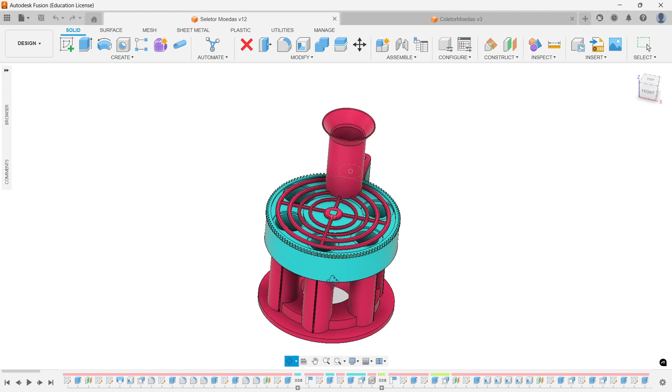Today we will continue the development of our coin collector project through a classification system, and you will learn how to create these 5 coin collecting elements that will be responsible for receiving and storing our coins.

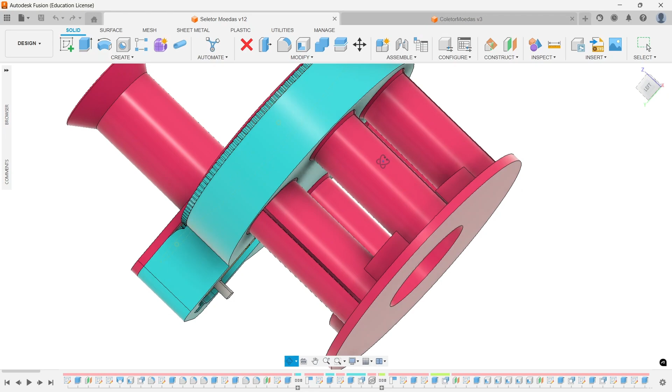From now on, come with me to our Projects tab, and we will start designing each piece from the last piece we finished.

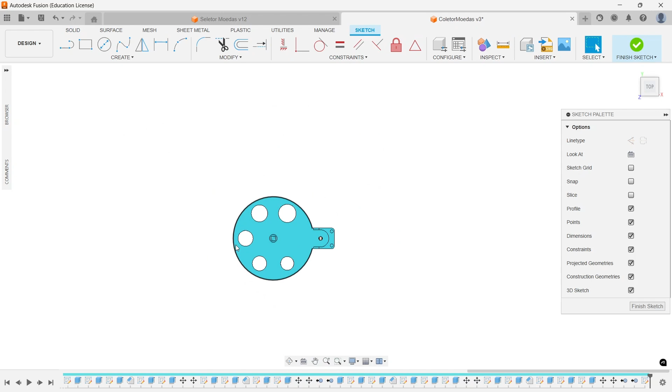Let's get started. First, we will draw the first coin collector, which is for the smallest coin, the dime. Click here and select this side so we can start drawing. Remember that the dimensions we are using are for the Brazilian coins we are using as reference. Adapt this project to the measurements of your country's currency.

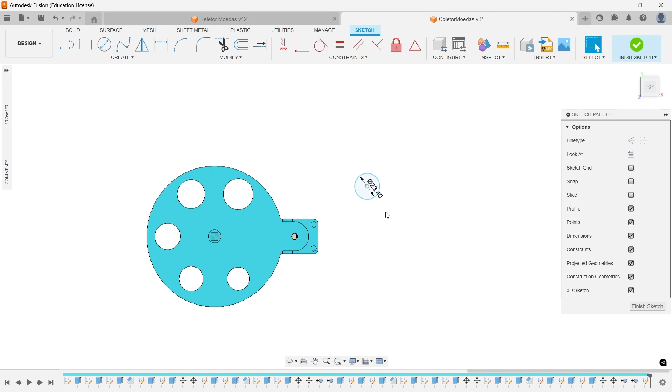Now, select the Circle tool and draw a circle with a diameter of 23.4 millimeters. Then finalize the sketch and go back to the isometric view. Select the Extrude tool and apply a value of 67 millimeters.

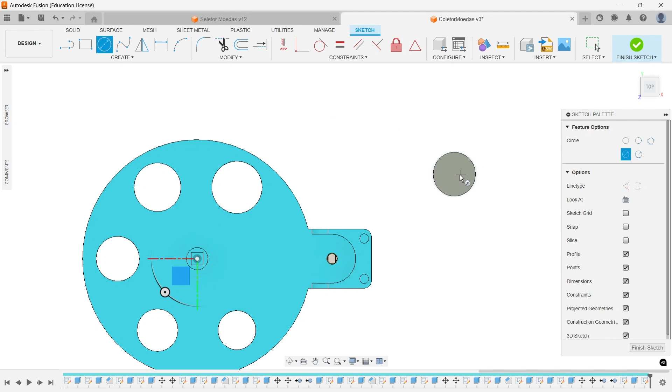Next, you need to create a new sketch, and now select this face. With the face selected, select the Circle tool and draw a circle with a diameter of 26.4 millimeters. Click Finish, and now use the Extrude tool.

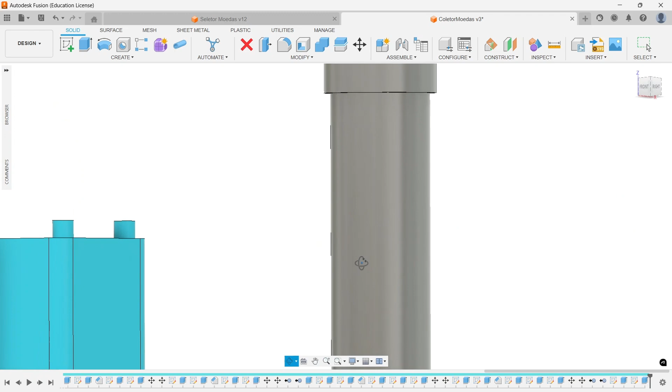Select the entire circle and now apply a value of 9 millimeters, then rotate your piece. And apply a chamfer worth 1.5 millimeters.

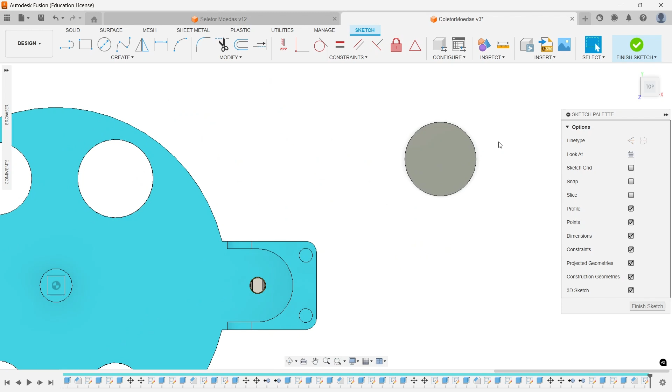After applying the chamfer, return to the isometric view. Create a sketch on this face, and now create a new circle with a diameter of 23.4 millimeters. Finish the sketch and now apply an extrusion with a value of -4 to remove material.

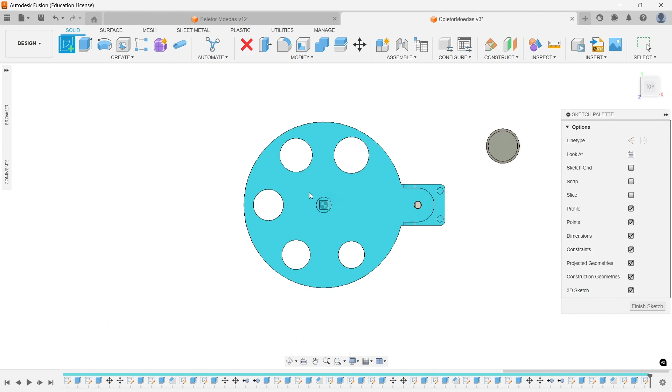Then create a new sketch on that face, and now with the Circle tool, create a circle with a diameter of 21.9 millimeters. Finish the sketch, and now use the Extrude tool. Select this circle and set a cut value of -70.

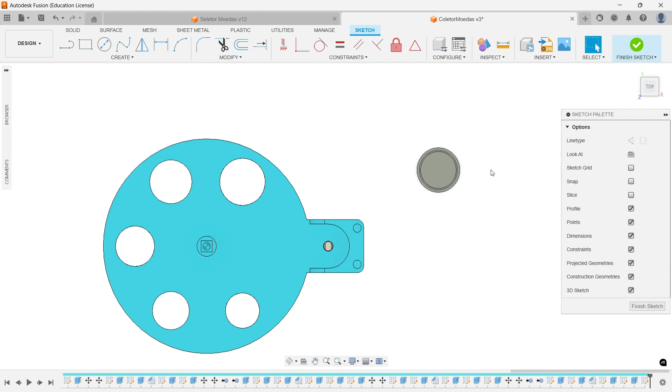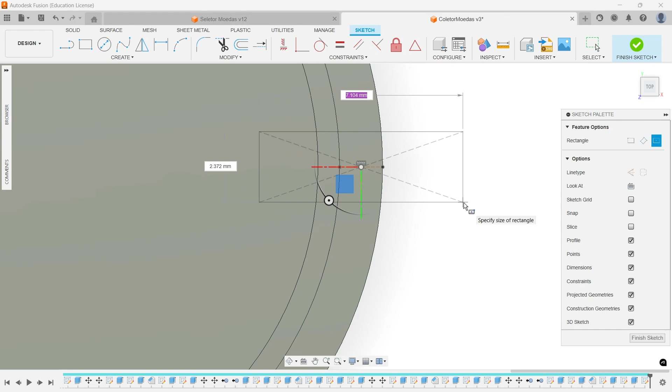Finally, select this face. Select the Line tool, click on this tangent point, draw a line and put it in construction line mode. Now, with the Rectangle tool, select a rectangle with a center, and at the midpoint create a rectangle with a length of 30 millimeters and a width of 1.5.

After creation, finish the sketch and now go back to this view. Select the Extrude tool and apply a cut to the entire piece.

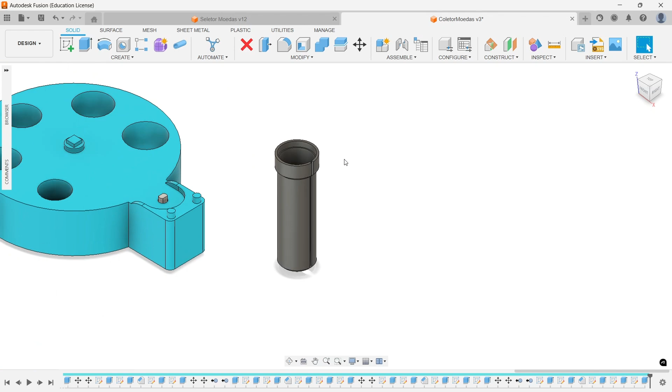This structure of this cut will serve to facilitate the connection of this piece with the hole where we will fit it, in such a way that it can enter and apply a certain pressure through this cut on the inside and ensure that it is completely fixed in place.

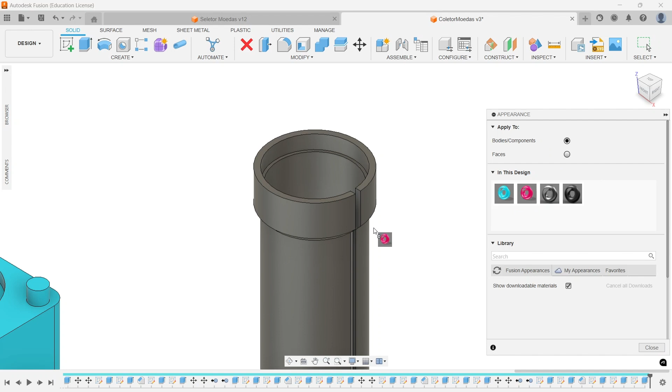Next, click on the letter A to enter appearance mode. Select this red material and apply it to your piece. That's it. Now our next step is to select this piece.

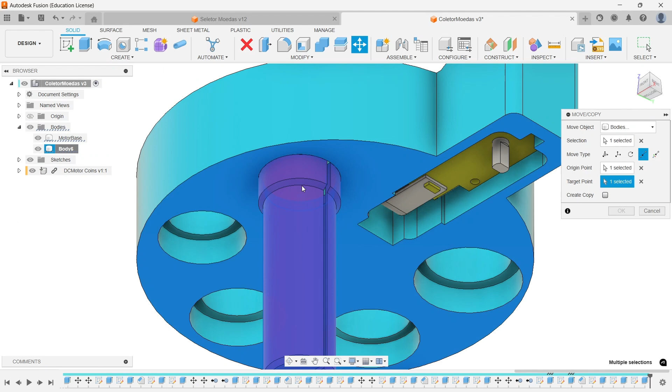With the Move tool you will position this piece through points. Click CTRL, select this point, and now we will position it in its place. Now apply a value of 9 millimeters, and that's it. Our piece is positioned in its desired location.

Let's do this same procedure for the next coin collectors. For our next coin collector, we will perform the same procedure, and now change the name of this body and put the name of our currency to make it easier to identify. Next, we will carry out the same procedures we did previously, and now draw the collector of the Brazilian 5-cent coin.

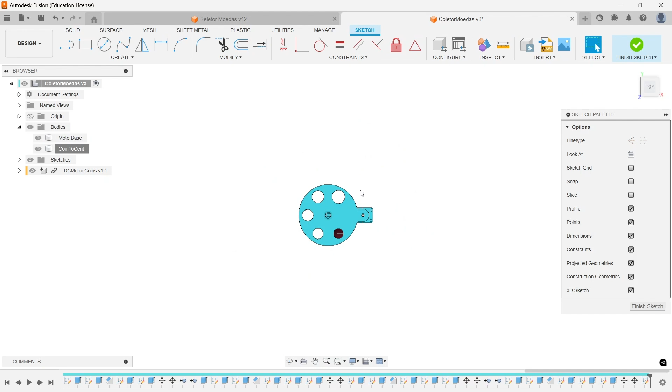You will create a circle with a diameter of 25.4. Click OK, and now apply a 67 mm extrusion.

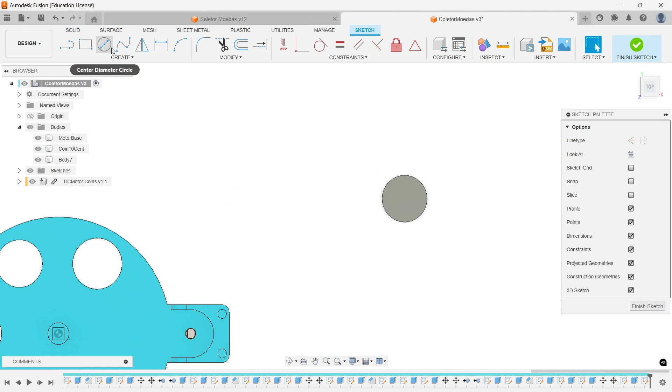With the extrusion applied, select the sketch tool, select this plane, and now draw a circle with dimensions of 28.4.

Now finish the sketch and go back to the isometric view. Using the extrude tool, apply an extrusion with a value of 9 mm. Then, apply a chamfer at that point.

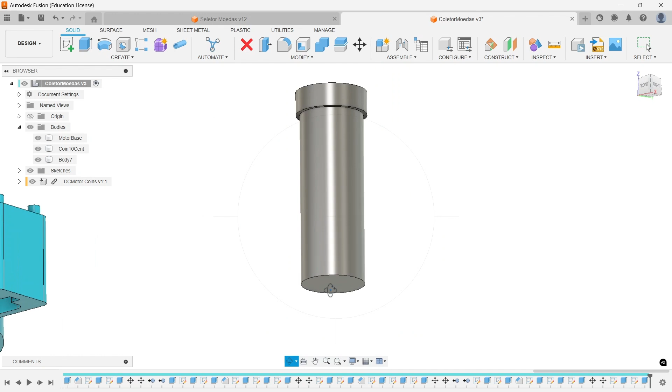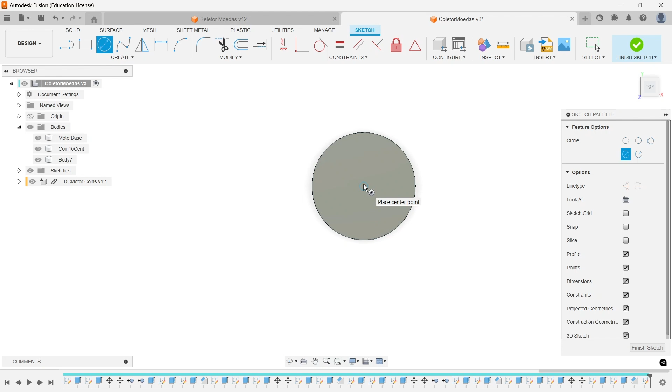Apply a 1.5 chamfer. Now, through the sketch tool, select this plane. Select the circle tool and draw a circle with a diameter value of 25.4. Now finalize the sketch. Select the extrude tool and apply a value of -4 for the cut.

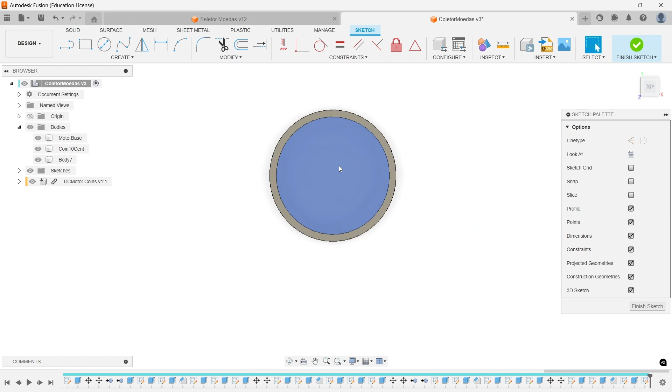Do the same procedure by clicking on Sketch again, and now select this face. Create a circle with a diameter of 24 mm. Finalize the sketch, then select the extrude tool and apply a cut value of -70 mm. See the result. Now, to finish.

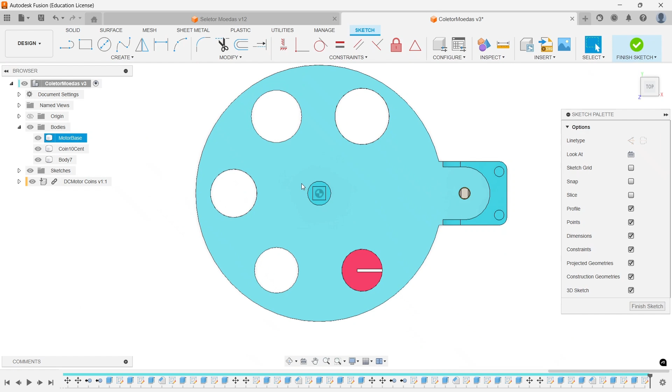We will make a cut to make this structure more malleable, so that it can fit into the whole structure and facilitate its fixation.

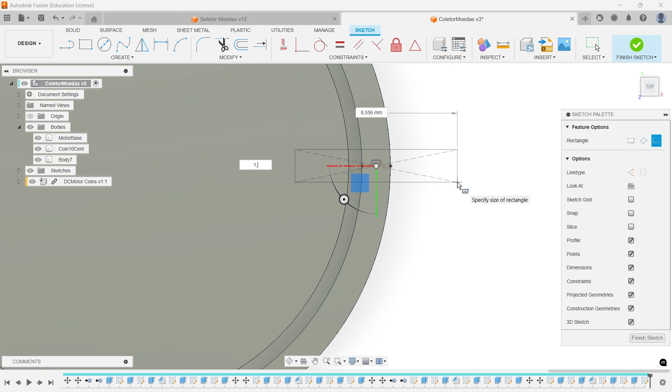Click on Line, Construction Line Mode. Click on this tangent point. Exit Line Mode and select the Rectangle tool. Draw a rectangle with a center, using the same value as before: 1.5 by 30 mm. Now finish the sketch.

Select the extrusion tool. Select your entire sketch and apply the crop. Finally, access the appearance environment and apply the material.

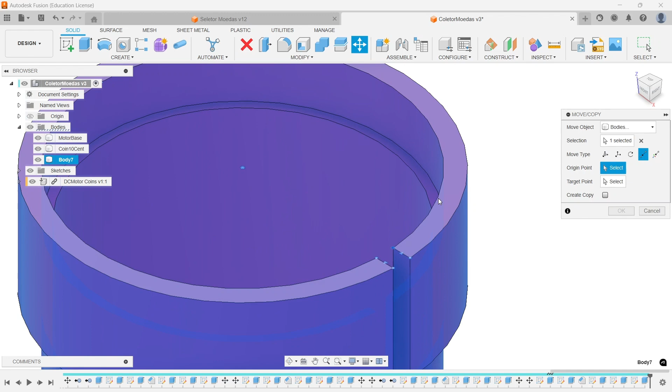Now we will position this piece in its place with the Move tool. Click on Movement by Points. Click Ctrl and select this point, then move our part to its fixing location. Apply a value of 9 mm, and that's it. Our part is now positioned in its assembly location.

Let's change its name. Done. We have finished drawing the second coin collector. Now we will move on to the third collector, following the same procedure and measurements for the next coin.

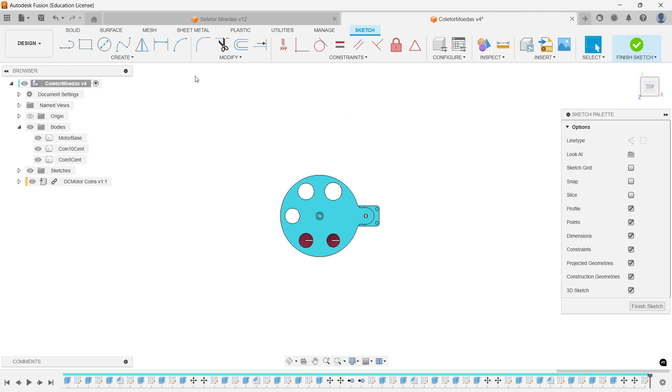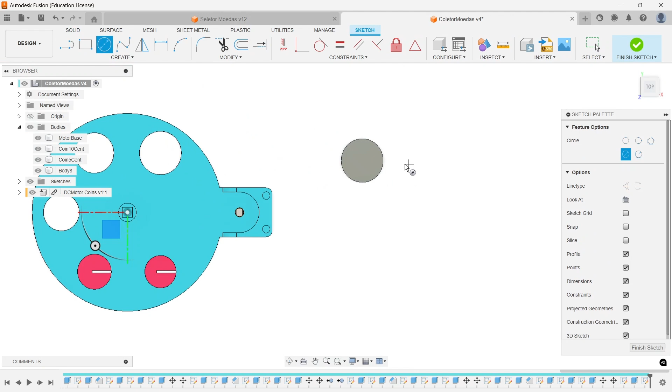Now we will carry out the same procedure for the Brazilian 50-cent coin. Create a new sketch, select this plane, and use the Circle tool. Draw a circle with 28 mm and finish the sketch. Apply an extrusion with a value of 67 mm, then select this top face and draw a circle with a diameter of 31 mm.

After applying the circle design, select the Extrude tool and apply a value of 9 mm, then apply a chamfer with a value of 0.5 mm.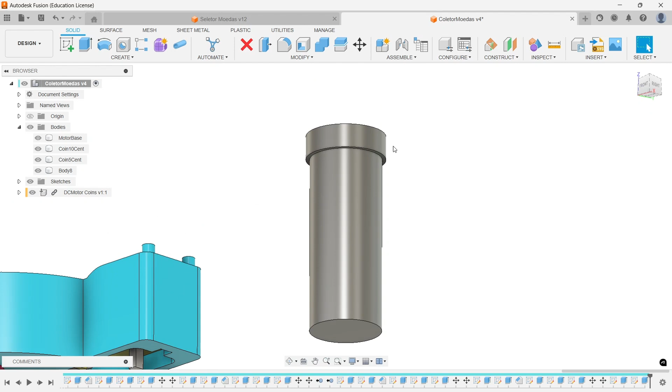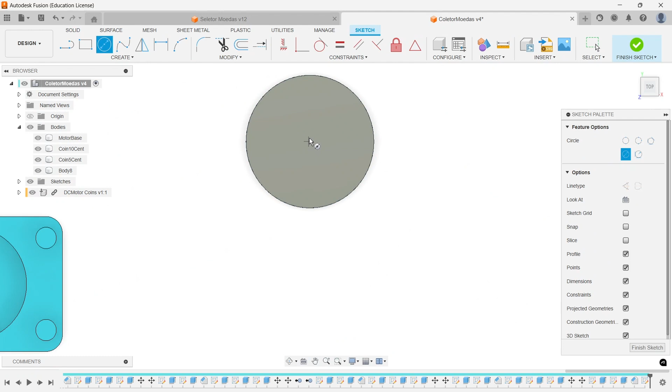Go back to the isometric view, select this face with the Sketch tool, and create a sketch on this face. Draw a circle with a diameter of 28 mm. Finish the sketch and apply an extrusion with a value of -4 mm.

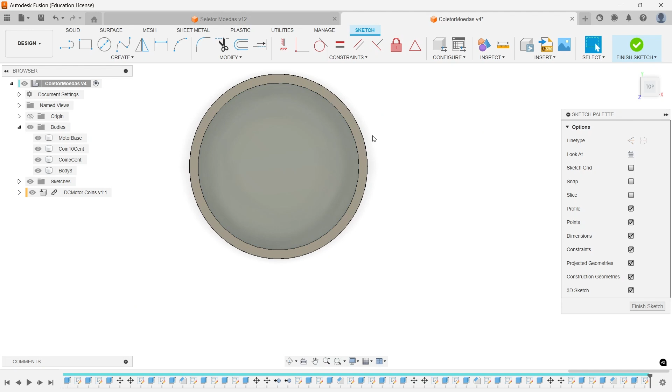Again, create a sketch, select this face, and draw a circle with the value of 26.50 mm. Finish and select that circle. Using the tool, apply a value of -70 to remove material.

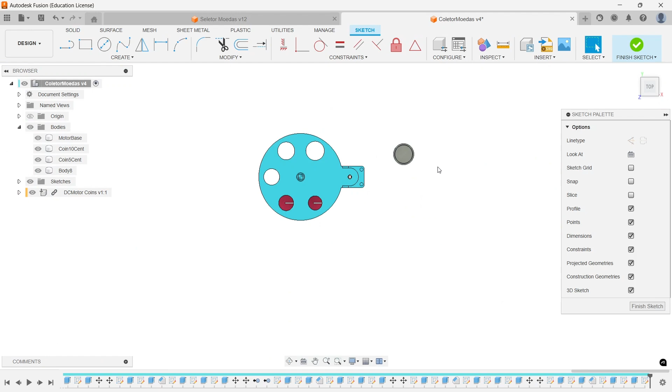Finally, we will perform the same procedure as in the last drawing. Select this face and now we will create the cut to facilitate fixing our piece to the structure. Use a line, in construction mode.

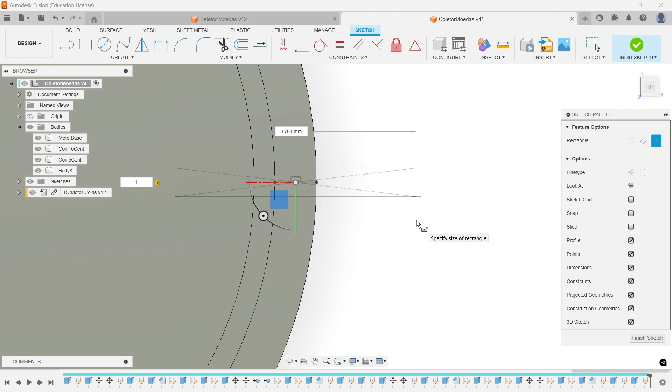Now with a rectangle tool with the center, create a rectangle 0.5 mm wide by 30 mm long. Finalize the sketch. Select the Extrude tool and apply a cut. See how our piece turned out.

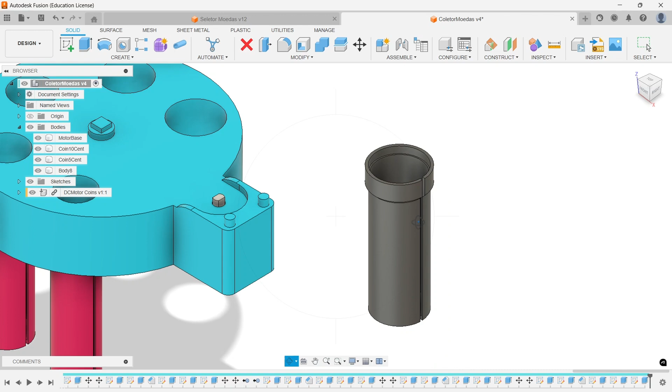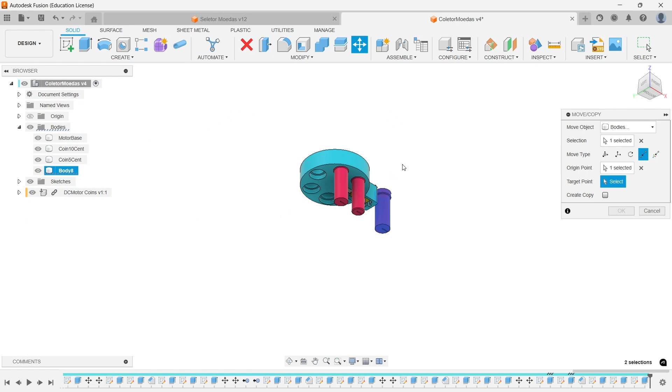Now apply a material, and then we will position this piece in its place. Select the Point to Point option, click CTRL, select the point, then click CTRL and select this other point. Make a free movement, and now apply a value of 9 mm.

And here is our third coin collector. See how the result looks so far, with the construction and modeling of these 3 coin collectors.

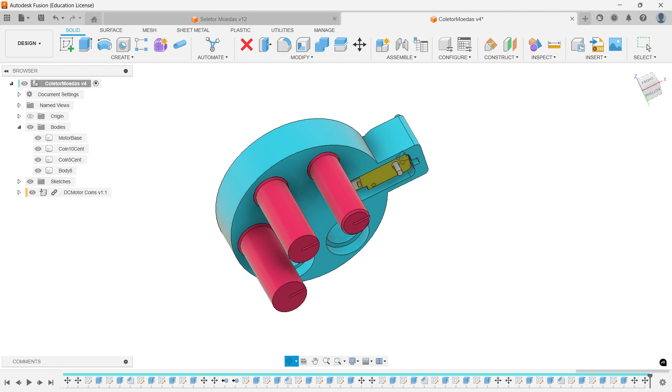Now let's do the same procedure for the 25-cent coin. First I'm going to change the name of this element to refer to its coin. Next we will create the collector structure for the quarter.

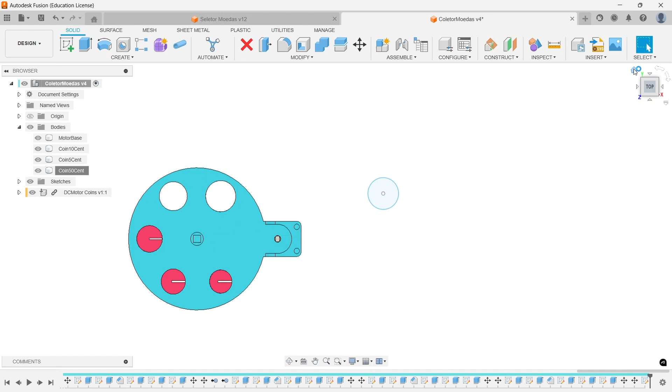Select the Circle tool and create a circle with a value of 28.4 mm. After creation, finish, and with the Extrude tool, apply a value of 67 mm. Select the Sketch tool, select this face, and now create a circle with the value of 31.4 mm.

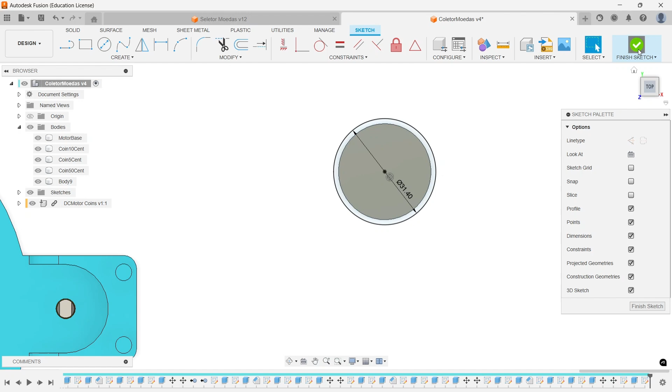Next, finalize the sketch. Select the Extrude tool and apply an extrusion with a value of 9 mm. Again select the Sketch tool, and now apply a chamfer with the value of 1.5.

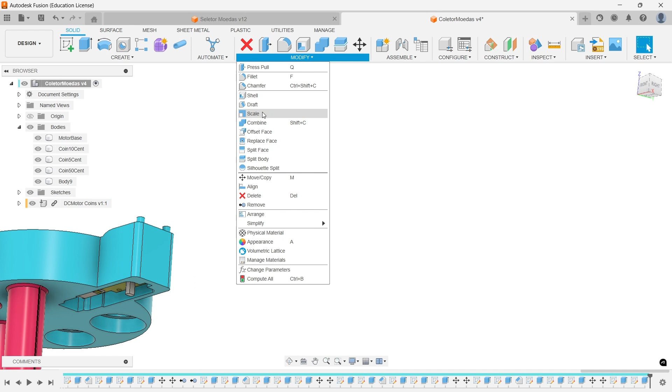Now go back to the isometric view. Select this sketch on this face, and here you will create a new circle with a diameter of 28.4 mm.

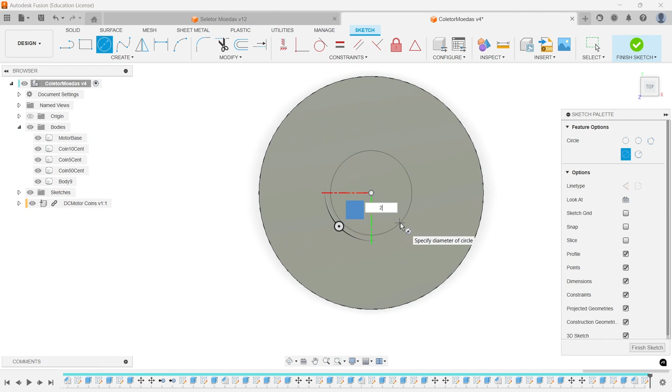Finalize the sketch. Now select this element and apply an extrusion with the value of -4, again with the Sketch Creation tool. Select face, and you will draw a new circle with the value of 27 mm.

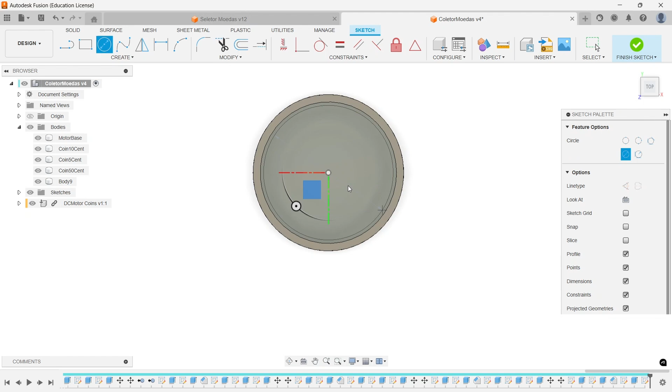With this circle drawn, you will now apply an extrusion with a value of -70 for material removal. To finish, select Sketch again.

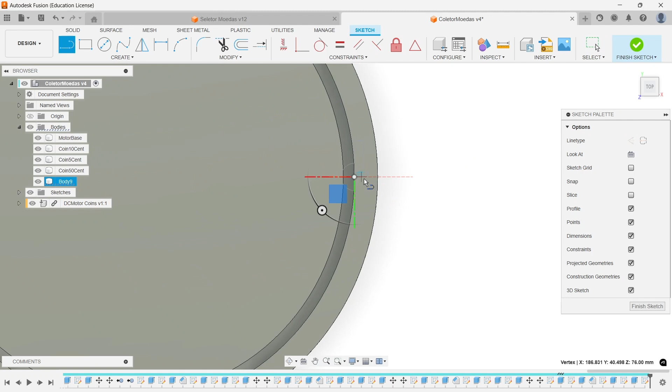Line tool. You will create a construction line for us to make a cut in the structure of this piece. Click on this tangent point.

Select the Rectangle tool, exit the construction line mode, select Rectangle with center, and you will put a value of 1.5 by 30 mm long. See the result.

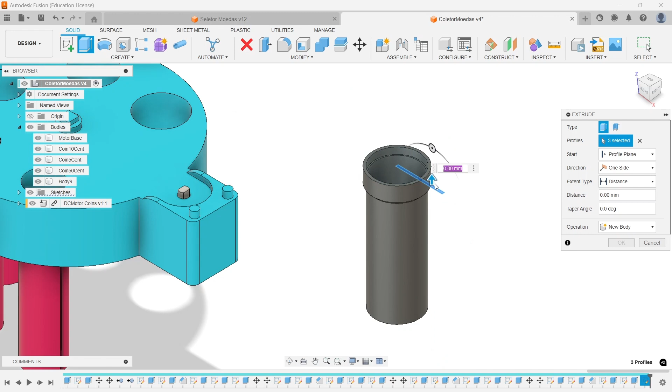Click Finish, and now you will use the Extrude tool to make a cut in your part. Finish the piece, and now do two things: apply the material.

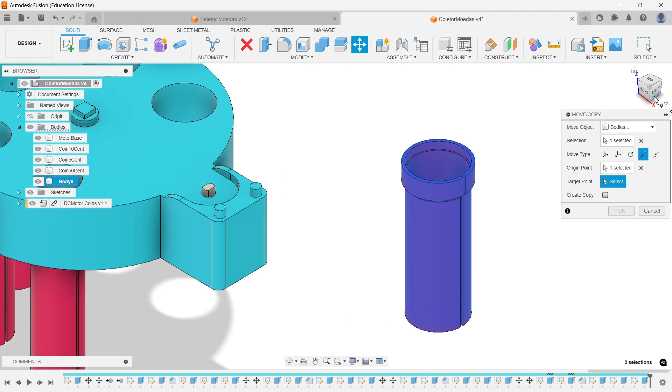Select the part, and we will move it to its place of assembly. Done. Our part is positioned in its assembly location.

Now we will draw our last collector, which refers to the one real coin. Before we draw the last collector, let's change the name of this body.

Done. Now we will begin the process of designing the last collector, the last coin collector for the 1 real coins.

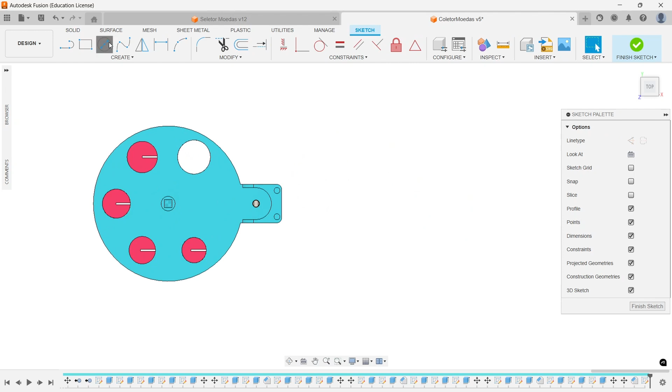Select this face, create a sketch, and now with the circle tool, you will draw a circle with a diameter of 31.85 millimeters.

Finish the sketch design, and now with the extrude tool, you will select and apply an extrusion with the value of 67 millimeters. Next, you must create a new sketch by selecting that face.

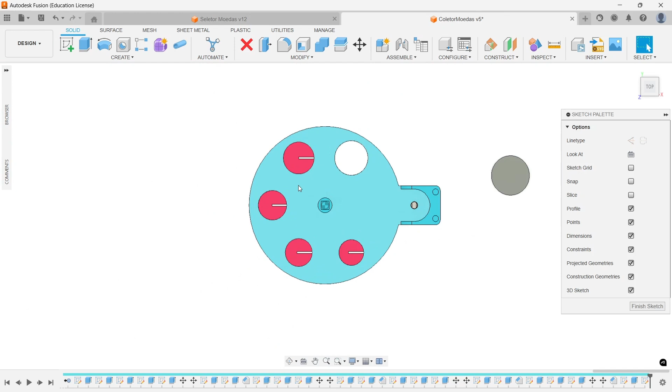Now you will create a new circle with a diameter of 35 millimeters. Then finish the sketch and apply an extrusion again to the created sketch.

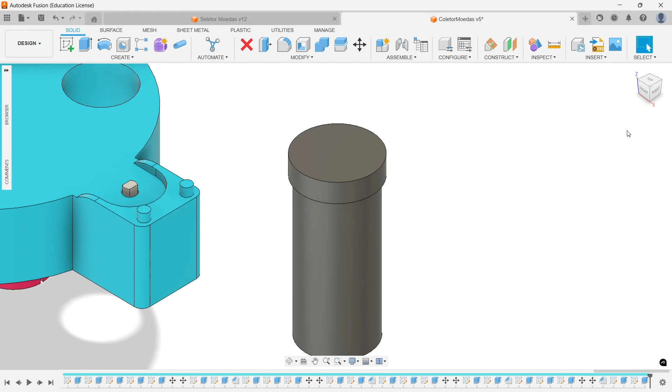Put a value of 9 millimeters, and now we will create a chamfer. Set the value to 1.5 millimeters.

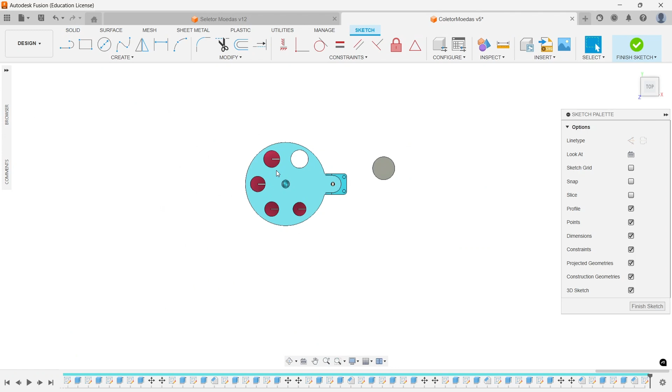Then you must select that top face, and you will create a circle with a diameter of 32 millimeters.

Finalize the sketch, and now with the extrude tool, you will select this circle and apply a value of -4 to do the material removal.

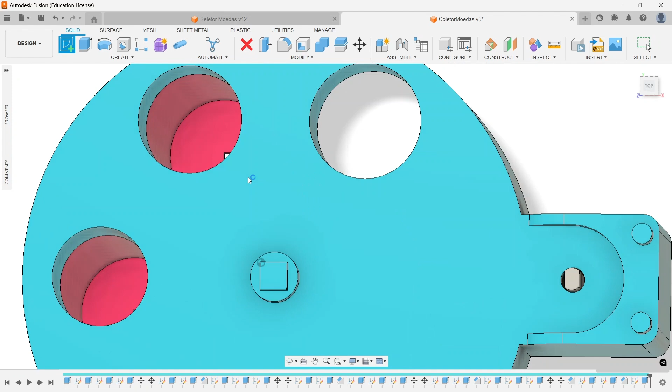Again, create a sketch on this face and create a new circle. Now you will use a diameter of 30.45.

With this sketch created, finalize the sketch. Select the extrude tool and now apply a value of -70 millimeters.

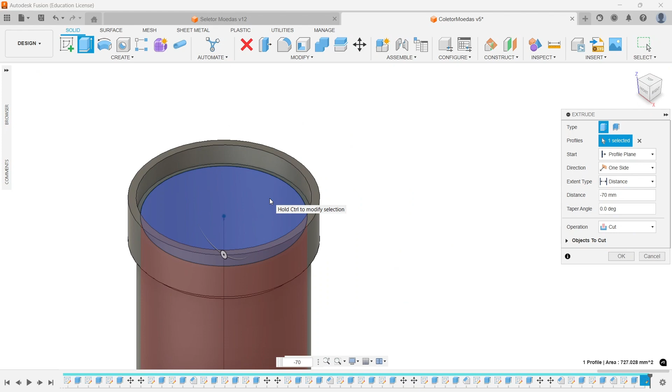Finally, we'll apply a cut, so select this face. Select the line tool, construction line mode, and on the tangent you will draw a line.

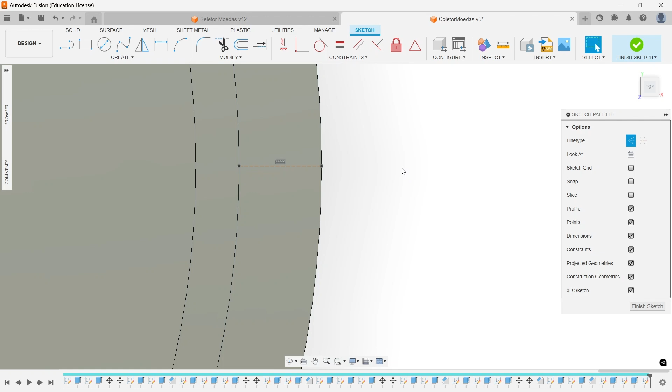Now you will draw a rectangle with the center, with the value of 1.5 by 30 millimeters. To finish, we will apply the cut that you have already made several times using the extrude tool.

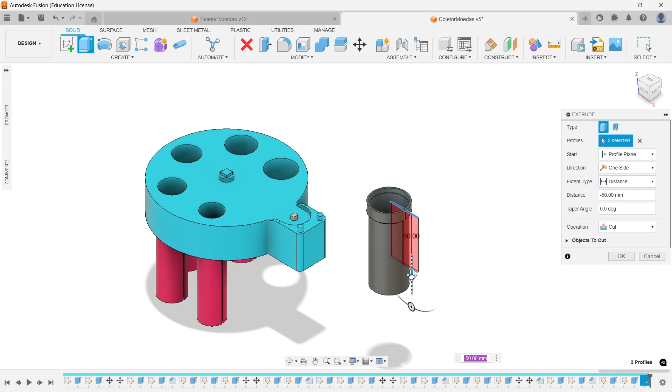With the cut applied, enter appearance mode, apply the material, and finally position the piece in its desired location.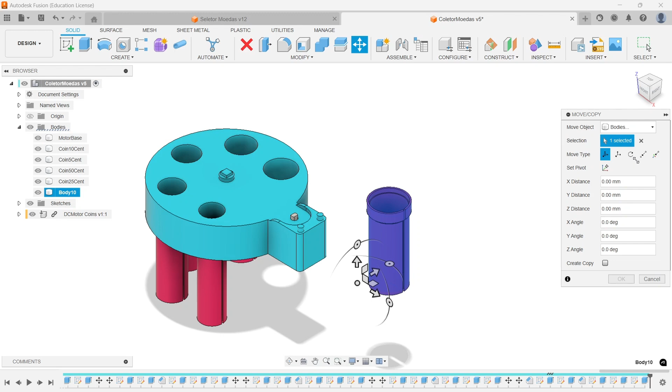Select movement by points, click on that point, and finally move the piece to its desired location. There you go, see the result.

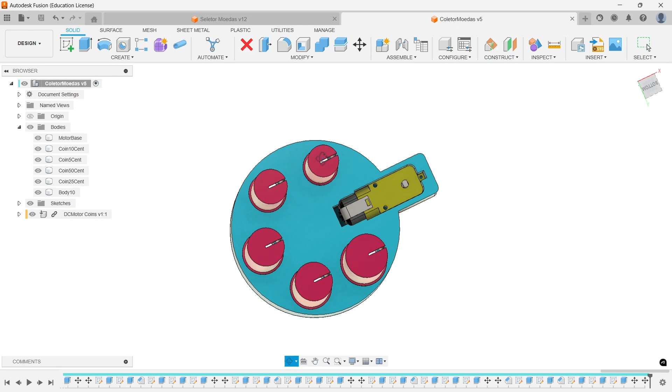Notice that we now have all the coin collectors positioned in their proper places, and now we have finished the drawing.

The complete modeling of all the collectors, and in the next video we will do the entire process of designing the base for all the collectors.